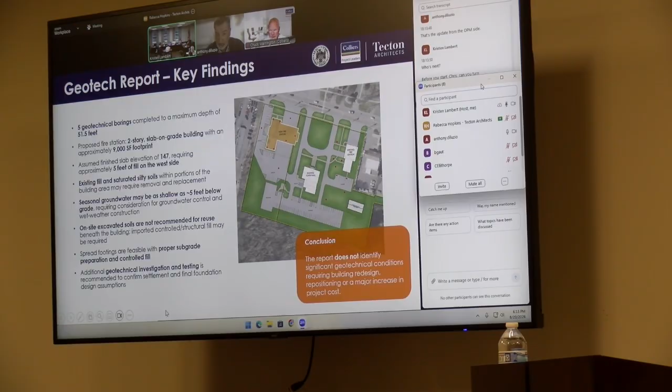Okay, so I will focus on the fire station project. If you want, I can jump to that. We also have preliminary survey results, which apply to both projects, so would you like to touch on those now, or wait until later? Let's go through the building first and then we'll touch on the survey.

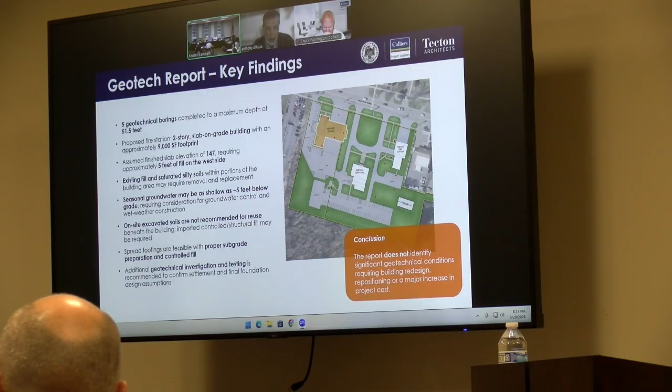To Tony's point, he just gave the recap of the geotechnical investigation, so I won't continue detailing that, but those were the major takeaways. The major conclusion does not identify any significant geotechnical conditions requiring redesign, repositioning, or anything of that nature. So to bring everybody back up to speed, or as a reminder of where we left off in our previous conversation.

The final program basis of design was a gross square footage of 12,450 square feet. We did have an alternative additional program for the community training room and sport spaces that increased the facility size to 14,120 square feet. So those were the only two programmatic options on the table, your basis plus that small additional space.

If you recall last time, we walked you guys through floor plans which executed this program in a block plan format. Those were more efficient than this programming, so we did a little better on our net-to-gross adjustment in the actual execution of the plans. So the square footages associated with the options are slightly smaller, but it still meets the entirety of this program.

I have those in this slide deck. I don't have them in the main body, but if we want to bring those up to remind folks, I can absolutely do that. These were the three options that we landed on.

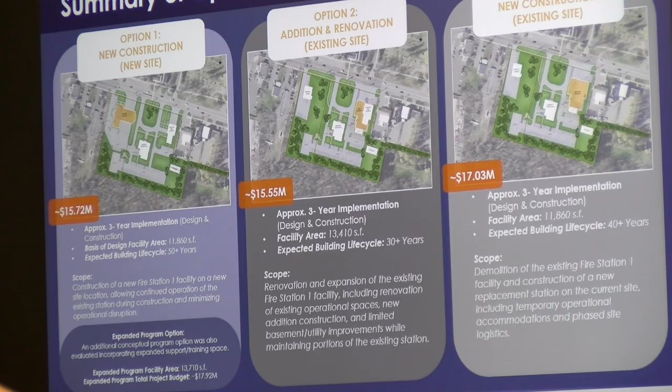Again, both program options can be on any of the sites. So we can do kind of that basis, or we'll call it like an add alternate piece program on the annex site as a new construction. We can do it as an addition renovation to your current station, or we can do a new construction where your current station is.

These were the three options that we kind of worked through previously. The scope of each one and kind of some of the pros and cons have been kind of talked through. So just to recap what those are: the first option was new construction on the annex site.

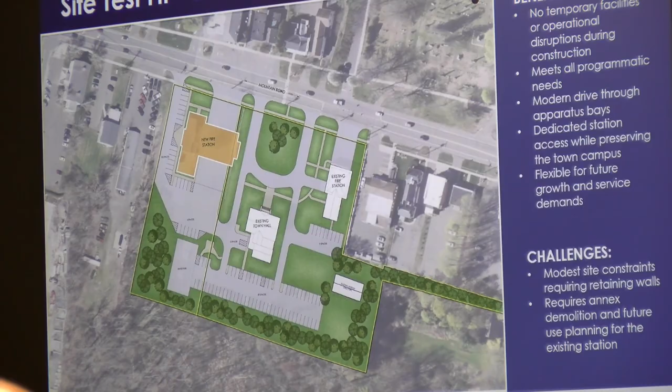First and foremost, no temporary facilities or operational impact during construction, because the existing firehouse would remain operational. Meets all the programmatic needs, modern drive-through bays - that was one of the compromises we were unable to accommodate in any of the renovation schemes. Dedicated station while preserving that kind of town campus, and flexible future growth for service demands given the space available on that site.

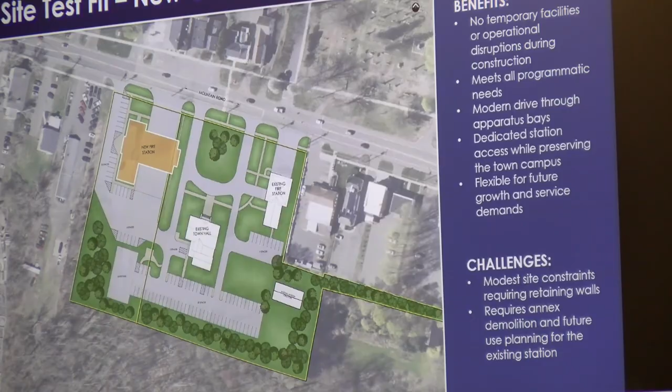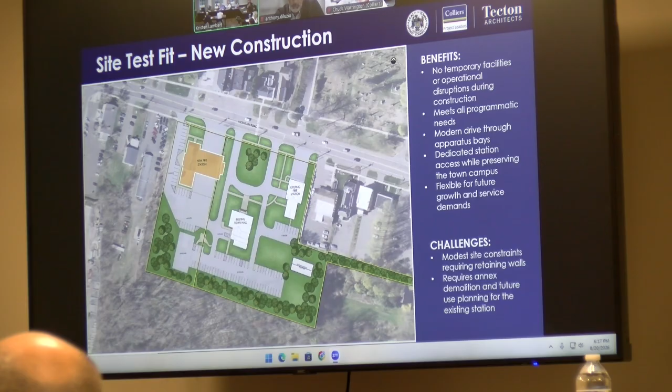Some challenges: we did talk about a few modest constraints. You have a fair amount of topography from west to east across the campus, so just being conscientious of how we're positioning the building - to Tony's point - making sure we're minimizing any required retaining walls or additional site development costs, keeping those in balance. And it would require annex demolition, so we would need to find a home for the departments currently in place there, and future planning for the existing station, what ultimately would become of that. Outside of our scope, but things to consider as a challenge of building a new station on the annex site.

Question for you: do we need to have a lot line moved?

That would probably be a question I would recommend presenting to the planning board. They're currently town-owned, but it is common that we've found it is a consolidation of lots, or they want to maintain a separation, or they need to modify that delineation for addressing purposes - are we crossing the line, right? Correct, we are slightly over that delineation. Sometimes it comes down to setbacks and things of that nature. So again, both town-owned, it would really just be a bit of a paperwork exercise, but I would advise that we seek insight from the planning board.

And Rebecca, I got one. In Max's report, he also talked about the groundwater table there - it could be like 5 foot below the surface. Right now it's like 7 to 10. And he's got the Mirafi paper, 2 feet of crushed stone and standard footings.

Yep. Doing the topography, he also brings up the fact maybe we could bring in some fill, pick that up. Have you looked at any of that, how that transitions to the road? That would be our next step. We started looking at it preliminarily - I'm asking too many questions. No, it's great. We did start looking at it preliminarily when we were reading that report.

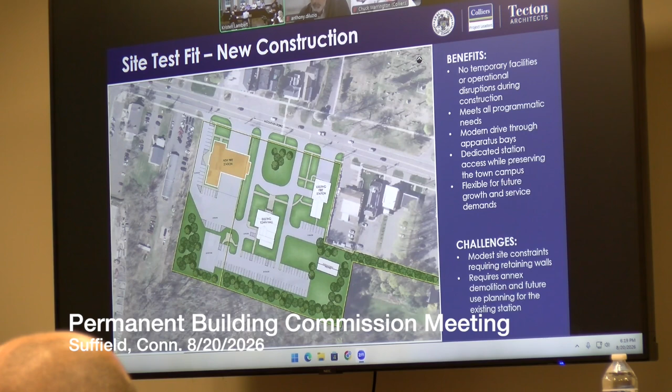I think he makes a good point, and Tony kind of alluded to that cut and fill balancing effort and where we position the building exactly. I do think we would be cutting on the east side of the building, filling on the west side of the building. But we need to make sure that we are as level as possible as that apron extends to the road. So that is just something we have to keep in consideration. Standard passenger vehicles can navigate those slopes much easier than a large apparatus can. We don't want to slow them coming off the site at all. So just something we need to keep in mind, keeping it level to the street.

If you do fill on the west side, and I think you had it on the slide before, you were looking at roughly 5 feet, plus or minus, preliminary. So we've got an auto dealership right next to the annex right now, and it's already lower in grade, so now we're another 5 feet up. So we're looking at a wall on that side as well. That's what we need to look at, and we want to be very conscientious of not increasing those site development costs.

And if there is a way for us to delicately balance that, that's what we're going to be looking to do, while also not trying to get into a dewatering situation. So just remember, we've got the retaining walls, finding that balance - walls cost big money today. We want to make sure we're doing that.

There'll be fine tuning, it's not major repositioning, but it'll be really important how we can balance that grading across. It's a relatively large parcel in totality, but it's a narrow development. We just need to make sure we can manage that grade between ourselves and our neighbor.

We don't want too big of a slope across that parking lot either. So a few things we're gonna have to look at, and that is definitely, to Tony's point, a part of the next 60-day conceptual package development. We want to make sure we're fully capturing those as part of that conceptual estimate.

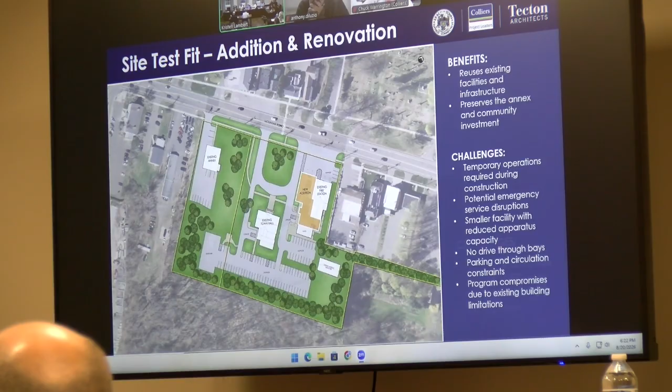To your point, she already had it on the slide with the 3 different cost valuations, a couple of slides prior. It's the new site at the annex is just slightly more than adding and renovating the existing site.

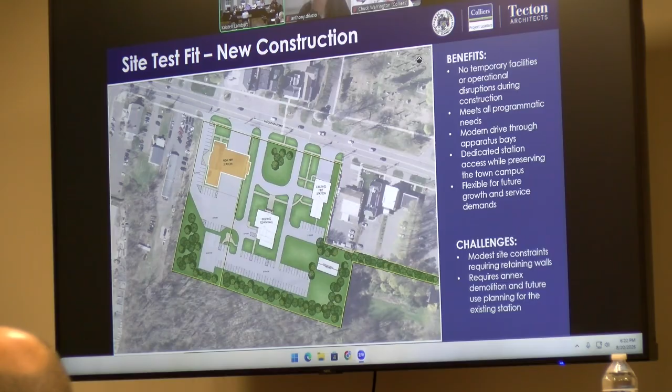And that's something we've seen change over time - those renovation costs have just increased, so they become more equitable. There's also a slight inefficiency. It was a relatively efficient plan, but it's not intentionally designed to meet this program, so there are some compromises.

I think one of the major compromises to the addition renovation is we cannot accomplish drive-through bays on that site. So they would all be back in - we'd be leveraging your existing bays, which handle smaller vehicles and are not equipped to handle your larger vehicles. So definitely a compromise programmatically on your apparatus bay capacity, which is inherent to their operational readiness and response.

And then just general parking and circulation constraints. We talked about that at length - where are volunteers going, parking, how are they getting to the bays quickly, with that very linear, stacked site. Also lack of future planning with this particular renovation versus the new site. Yes, there is really no room to grow, especially given where we would be positioning that parking in the rear.

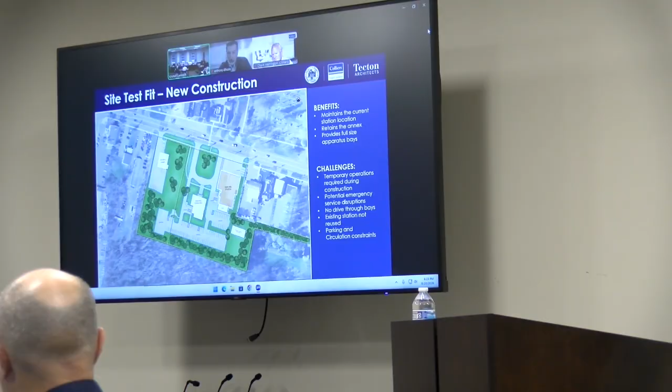So that third option - again, I know there were options on the board including the capital CIP improvement, we're just focusing really on our scope related to those 3. But the benefits here: it maintains that current station location, so it stays where it is today. And it does provide full-size apparatus bays, but it would definitely require temporary operations because we would be completely demoing their existing building, and definitely some potential emergency response disruptions.

It's possible to stage vehicles at other stations, but just for everyone's edification, and for those listening online, it's not that simple because certain vehicles are staged in certain areas of town for responsiveness, so we can't just move everybody to another station.

So just something to consider when you're thinking through temporary operations. From what I understand, all bays are full, so we don't have empty bays to move cars into.

Right. And sometimes you can leverage, like I've seen departments partner with a DPW department or other garage space. I've seen some departments rent a tent, which can be very, very costly just to heat that over winter months. So it's a substantial cost, it would be a major line item in our project development costs if that were to be required.

There's a lot of challenges with this plan as well, though. Yes, and it doesn't set us up for the future either. Same challenges as the addition renovation.

Okay, so those were the three options at a site test fit level. Again, is there any desire to see the floor plans again? I can bring them up if you would like, as long as everyone's comfortable. They all meet the program, I don't think we need to study that again.

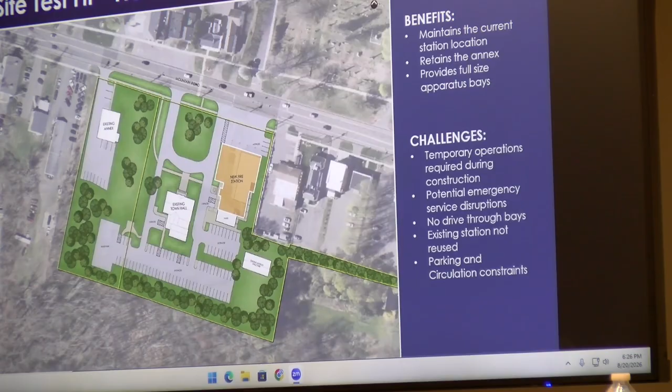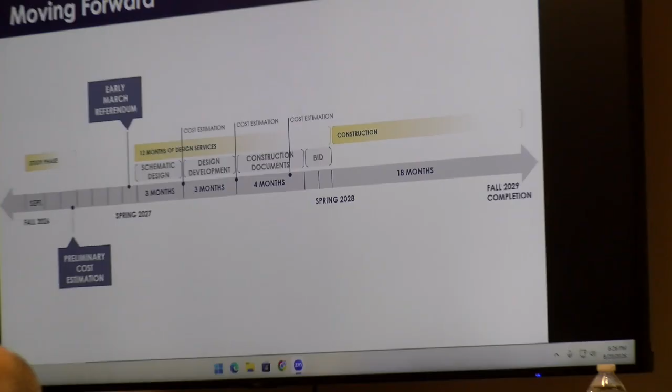So this is that timeline, just at a very high level. The remainder of our study phase is really a true conceptual design package. That in our mind is happening in September, October, over the next two months.

And then we need to send it out for a full cost estimation, so that would be complete by the end of November. After, if there is a successful referendum, one of the things we'd like to remind is that we have those standard design phases with estimation at the culmination of all of those phases, so that is something we'll continuously monitor all the way through the various design phases.

And then it just gives you a sense of, if this moves at this rate, you would be looking at a fall of 2029 completion for the study phase for conceptual design. Tony started talking about, we've got to fine tune the floor plans, we've got to design the exterior, that will include elevations and some renderings, so folks can get a sense of potentially what it may start to look like.

That is not a solidified design, it most likely will not look exactly the same when we build it. But again, it gives you a visual to anticipate the direction we are going. It's a great place to start to hear feedback from the community on whether or not they feel like it's going to fit. As a part of that, we will also bring in multiple engineers.

They will begin to write narratives relative to potential site development costs, potential systems to be included, so that the estimators have the appropriate means to price those pieces and components. Once that's sent to the estimator, we will go through it with them.

There are a lot of assumptions at this phase, as you know. We're not handing over a set of 100 drawings for them to piece through all the details. They are making assumptions. These are estimators that we have built multiple public safety buildings with, so they are very familiar with our quality and level of fit and finish, so these estimates do translate very well throughout all of those various phases in the future.

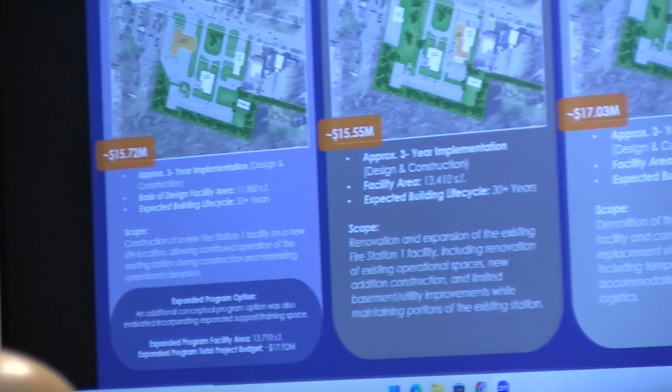Any comments? The one big advantage I see to this option is that it leaves behind the existing station, which can be transformed into a very valuable asset that we don't have right now. So while it is the more expensive option by a little bit, it leaves behind an asset that's worth way more than leaving behind the annex. So for that balance, those numbers could actually flip if you calculate that value. There is a cost to the building left behind, but I don't think it's going to be major. It's more work for Rebecca's team, actually. Yeah, if we use it properly. So that's my comment on it.

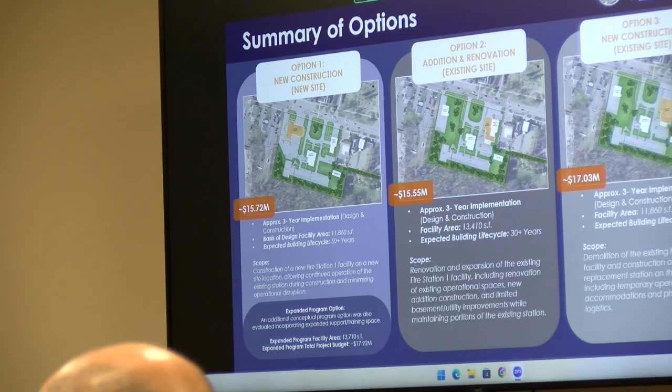Any other comments before we vote? Hearing none, all in favor? Aye. Nobody against? The ayes have it. We'll head down option one. Thank you.

Okay, thank you for your work on that. It was very helpful. Including your time in the sun out there. That was a pleasure.

Okay, we're gonna switch over to the schools, and before we get into the school construction project, just a facilities update. Matt, I think you have that for us?

Is that Matt Dunbar on? Did we lose him when we switched? Yes, there we go. Good evening. Thank you for switching with us. We didn't ask you, but you did it anyway.

Hang on one second, let me just, oh, shoot. Trying to get back to the agenda so I can do them in order here. Kevin, you want to just read them off for me?

The Spalding brick? Yes, so we expect to have the bid documents back from Silver Petrucelli this week, or early next week at the latest. Depending on if you all feel the need to review that or what have you, we'd like to get those out as soon as possible.

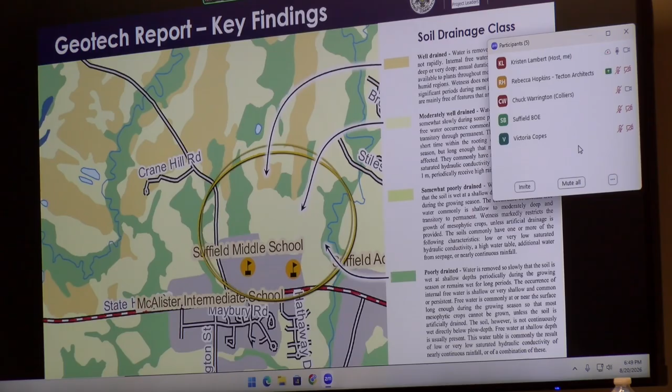This is here for basically just edification. This is the soil drainage classifications that Bldg used as the backdrop. They took a total of basically 4 official borings, and then they did a test bore. Borings 3 and 4 on the eastern side of the site are the troubled borings. As you move towards the west, B1 and B2, the soils get better. So obviously, I think it's Muddy Brook, there's more silts, less desirable geotechnical subsurface conditions the further you go on the screen to the right.

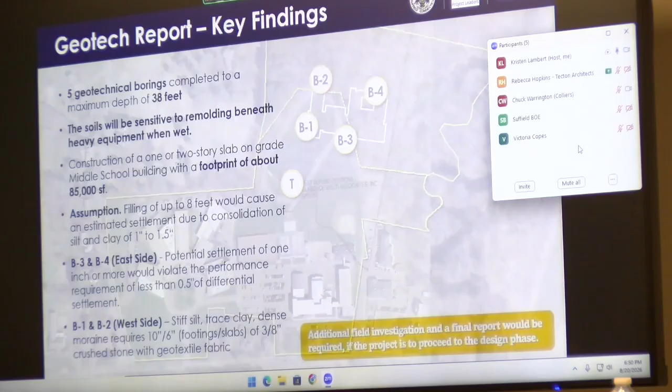So if you go to the next slide. The summary here, they did 5 borings, maximum depth at about 38 feet. There's a lot of clay, that's no surprise in Suffield, so we have to pay particular attention when there's heavy equipment moving around when it's wet. So we spent some time offline with the working groups talking about what premium or what level that would take related to the site costs. So we have some numbers there. And then these are just kind of footnotes taken from the report.

So the footprint itself is about 85,000 square feet. The assumption was, because we gave them a boring plan that showed the building more towards the northeast side of the site, because we were trying to find a spot for the building, the presumption was, without asking us, that they were going to just raise the grade 8 feet over that soil. So what that caused for concern, which is obvious, is settlement, right? So the settlement far exceeds the settlement that you want to put a building on that particular pad. So that became a real challenge.

So B3 and B4 on the east side have too much differential settlement. You can compact in lifts and measure the compaction in a series of months. We've done that, we just actually did that in Cheshire, but it's gonna delay the project a year. So it's not ideal, it's gonna cost you more money to bring in suitable soil, structural fill, and so forth.

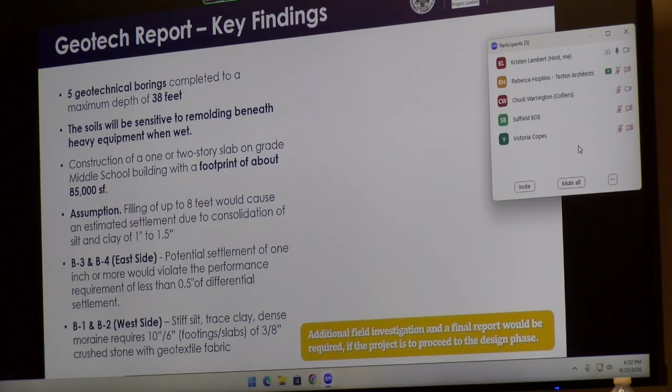So the last bullet on the screen, B1 and B2, the west side, it's better, and there's still trace clay, but basically it gets us back to a conventional subsurface with compacted 3/8 inch crushed stone under footings and it's 6 inches under slabs with the geotextile fabric. So it's more or less conventional. I have a slide in here that's kind of what they did, more or less, on the original middle school.

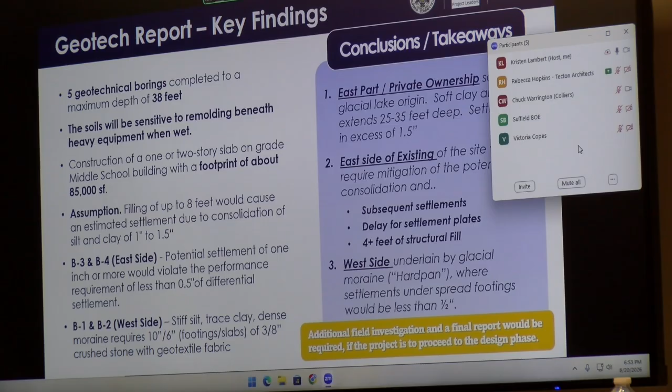So the conclusions and takeaways: both the east side of the site, whether it was the land we were looking at towards the north under private ownership, or under the current middle school and intermediate school site, are not desirable. So I think it's best to move the building towards the west. That was, I guess, a very high-level summary of what we learned through the geotechnical. So it's not as favorable as what Rebecca and Tony presented earlier. So what it's telling us is we want to be basically to the south and to the west, in very simple terms, to get us back to conventional.

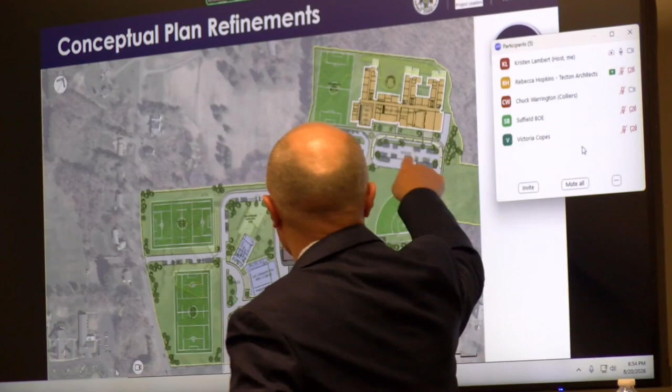This was the concept I think that we last presented before we did the site due diligence. It's a little bit difficult to see, but the dotted line here is the land that we were looking at to the north to make kind of this development happen. But that was before we did this due diligence. So now,

with the geotechnical information, we looked at moving the building to the west. And then on the left side, I won't go over it, but we did a brief analysis coordinated with Scott and Colliers on the premium that would take, if any, to develop that pad. So that kind of came in around $500,000. So when you move the building to the west and you turn it, what we're trying to do is still maintain a similar amount of parking, similar amount of fields. So that's kind of where we landed with that phase of the due diligence.

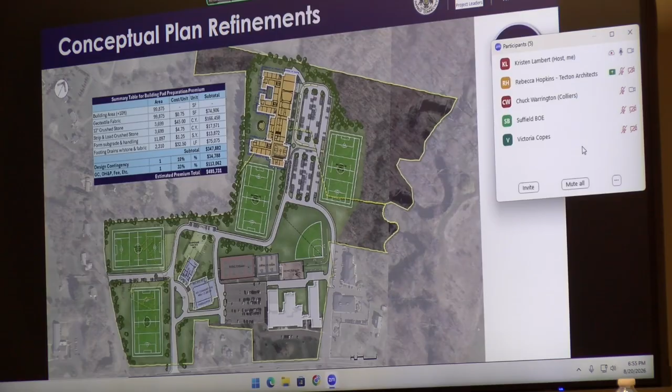And then the second phase was the wetlands report and survey. So this map here is what the sub-consultant came back with for wetlands identification. The green area, which is wetland A, is basically Muddy Brook.

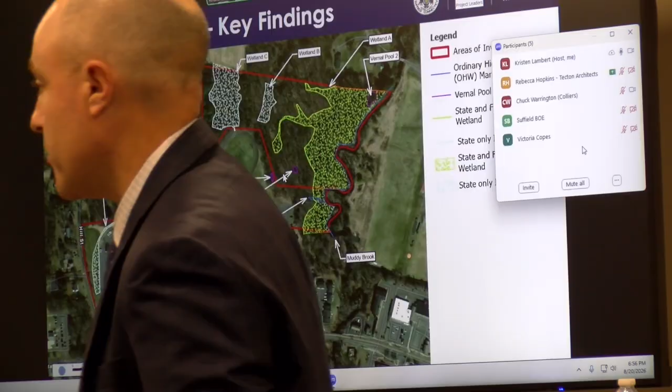It's in the detailed report, which is also posted on the share file. Wetland B and C are unrelated to wetland A, but nonetheless they're wetlands, so we need to deal with them. There's 3 total vernal pools, pool 2 here, and 1 and 3. Those were essentially created because of what happened when this building was put in. They created a drainage swale, then put in structured stormwater that has an outflow there. I'm not exactly sure, but I guess over time that created those 3 vernal pools, and those are essentially no-touch from a Wetlands Conservation Commission perspective.

And there's obviously setbacks to those. I'm sure you know them off the top of your head, but they're quite considerable. I'll sit here and be quiet.

Yeah, they're quite considerable. So when you overlay what we just learned with the borings and what we now know with the wetlands, we're starting to push this building further to the west and further to the south.

I will say there were some preliminary conversations about wetlands D and E, and those, I guess, can be modified so that we can have more usable area in the center of the site, if this commission and the community so chooses to study that portion. So it started pushing us around the site and back to where the fields are, or where the courts are, or where the building is. So it becomes a bit more challenging, not impossible.

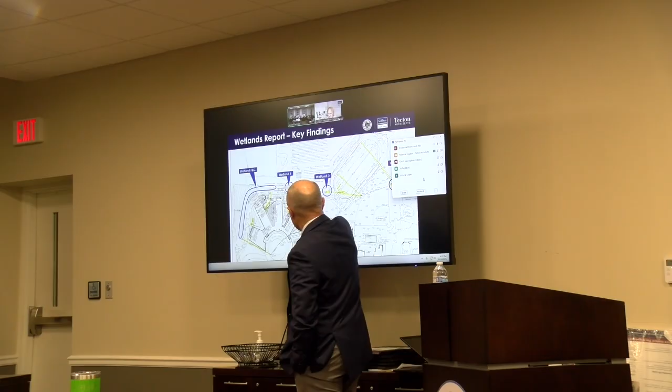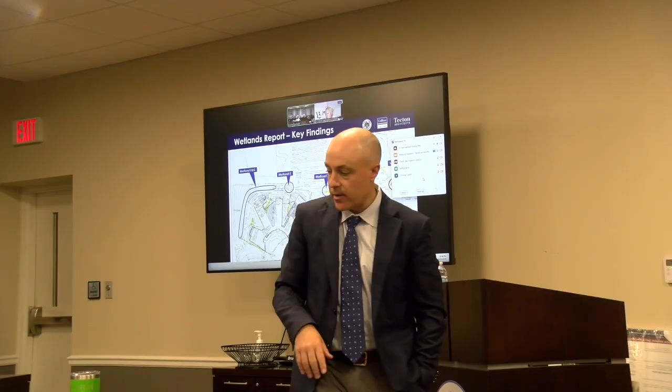So I just lined up wetland D, E, F, and G from the report, and you can kind of see there's structured stormwater that then goes underground under what used to be the track, and then out to where those vernal pools are. So that's kind of the history of how we arrived with what we arrived with on the site.

Then Jeff, all of that water is directing east towards Muddy Brook through that?

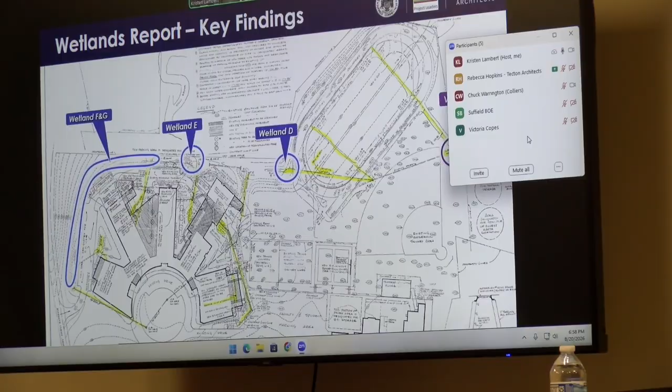Yes, as far as I can tell, there was a structure, because way back when, and I'm sure others on the commission know, there was, I guess at one point, some either pond or water. It's definitely the wetlands you can see kind of came through here. And obviously I think there's a drainage structure that goes under the mountain road, but I believe still most of this goes in that direction.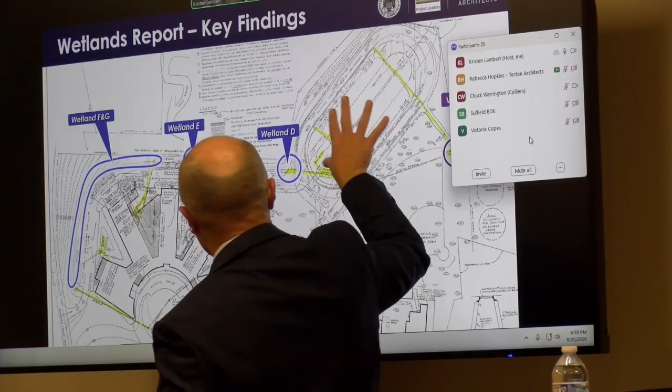So, and you can see when you go down in here, this one is not as well maintained. So the whole idea or concept behind this original drawing was to basically get the water around the building and around the track. There are some under drains here originally that were installed, but I just don't think over time, over whatever, it's been 40, 50, 60 years, they haven't been maintained, so that's why this thing's kind of falling apart a little bit. But when I was out there in the fall, there's running water continuously there, regardless if it's raining.

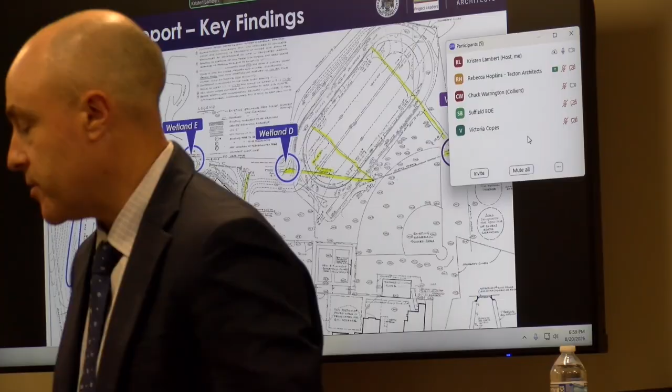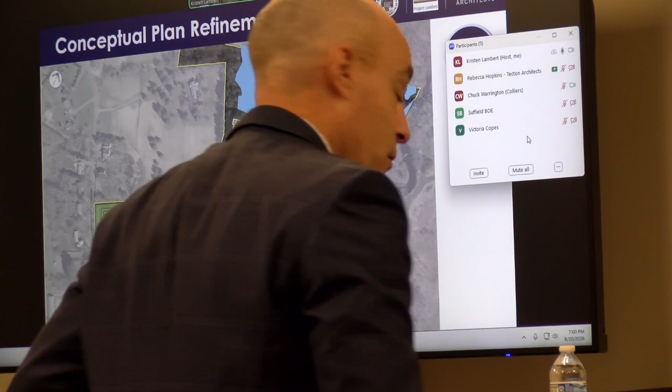So we updated the options continuously as we received this due diligence information, and now have arrived—this is a composite of where we are now, just for folks that are watching or want to watch later. The blue, we just shaded it so you can kind of see the overlay and the relationship.

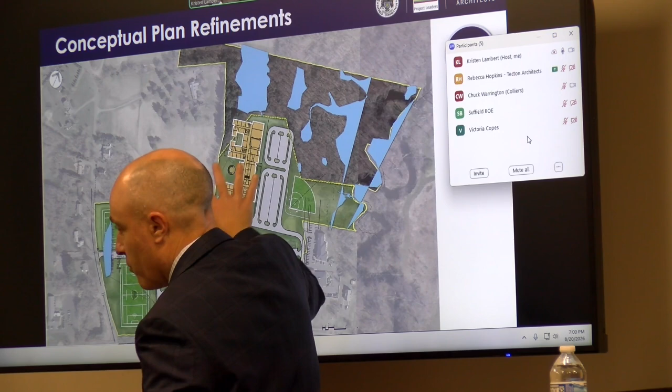So informal discussions, obviously, with the building over here—stormwater quality and treatment becomes a real issue with vernal pools. So this would likely have to move further away or be consolidated. Really what all of this due diligence information is telling us is we want to be over in this area as much as possible. So all of this information and all these conversations occurred over the last month.

Where we are to date, just to talk about next steps, and I'll park it there. I have another plan, but we can discuss it and whether or not you want to talk about that in executive session, just because it's an adjacent area.

So the options, going back to where we started this study, was renovate as new. There were a couple different renovate-as-new options. There was the one I presented most recently, trying to preserve as much of the building and add in the center. And then we did one six years ago that was much more extensive, for the master plan.

So we might head back to that. This is a discussion. And then we can look at what we haven't looked at yet, because that has evolved over the last month or so, now taking a much harder look at this area of the site, changing the shape of the building, seeing what we can fit in there. That might come with some pain, relocating some of these courts if we have to. But when you start weighing things like structural fill versus relocation of courts, it starts to make sense, if new continues to be the preferred option. I think the community deserves to study it, to see what it could look like here and what the impact would be. There's gonna be some modifications we originally were told not to touch, so.